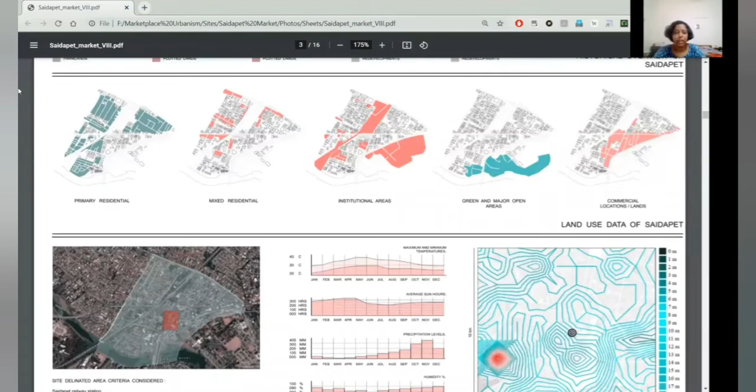Hello everyone, I'm Amrita and I'll be taking over the land use and extent segment of this sheet. The maximum land use in the delineated area that we have chosen consists of primarily residential, followed by institutional areas - that is, the railway station - and then green and major open spaces, commercial, and mixed residential. Mixed residential mainly entails ground floor buildings with ground floor as shops and first floor and second floor as residences.

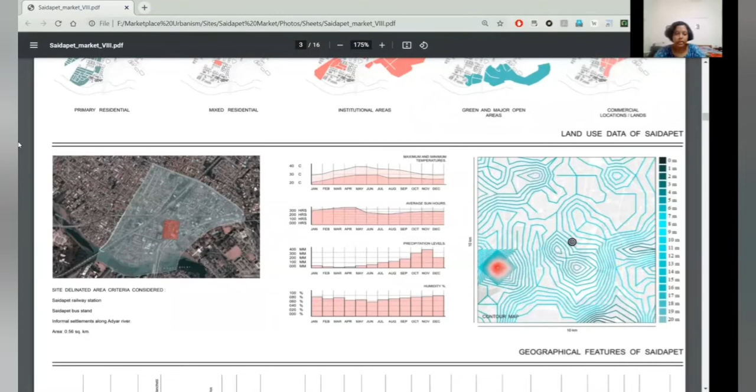The criteria considered for the delineated area are Saidapet railway station's location, the location of Saidapet bus stand, and informal settlements along Adyar River, which act as both a customer base for the market as well as a workers base for the auxiliary workers in the market. The total area is about 0.56 square kilometers.

Welcome back. I'm going to discuss the geographical features of Saidapet. As you can see in the contour map, I have taken a total of 10 kilometers by 10 kilometers square to show what exactly the contour situation is in that particular area.

It is clearly visible that Saidapet market itself does not have any slopes right in the market side. However, on a bigger look, it is slightly sloping towards the east and south side, and on the west side it has a slight more elevation. So the contour did not affect the site much, though slight drainage problems can occur.

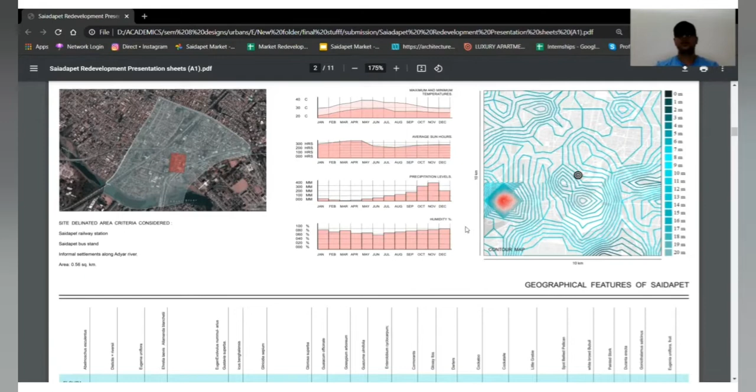With the climate issues, this particular site did not have much of a microclimate because the vegetation in this area was missing. They had vegetation, however we were not able to find dense vegetation or a dense group of trees anywhere. So it had a typical Chennai hot and humid climate, with precipitation levels going up to 300 mm at max.

It had a wide variety of flora and fauna in this area, with neem trees and peepal trees being the most common, and small bushes across every area, plus the Adyar River that served as the major source for watering the plants.

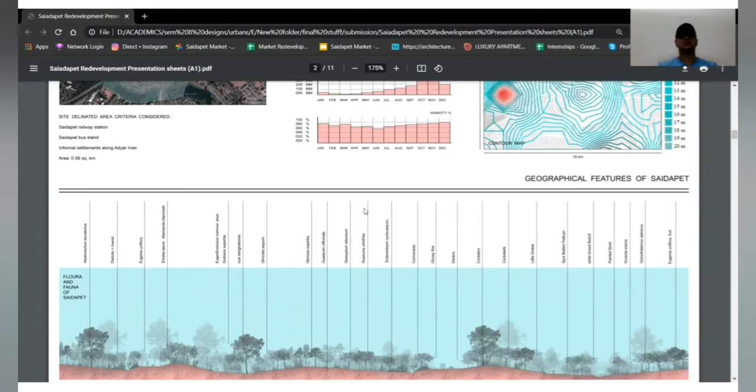As far as the animals go, it's an urban area, so we found most of the animals being stray dogs and stray cats. Two of the most common bird species found were the spot-billed pelican and the white-browed bulbul. These were the only major birds found roaming around the site close to Saidapet.

Hello, this is Pradeep Sundar, and I'll be explaining the introduction of Saidapet. The Maraimalai Adigal Bridge was constructed in 1726, connecting the northern banks of Adyar with the south. It was later reconstructed in the 1960s and now acts as the connecting bridge between Guindy and Saidapet. People coming from Guindy to Saidapet market cross the Adyar River via Anna Salai through this bridge. It was originally obtained by the British East India Company in the 1700s, and it also acted as the administrative headquarters of Chengalpet until 1946.

Around 1945 to 1946, Saidapet was included in the Chennai City Corporation, and the administrative headquarters was shifted to Chengalpattu itself. Until then, Saidapet was the administrative headquarters of Chengalpattu, and it had a large weaver population, with handlooms operated until the late 1990s as well.

It is also known as Saidai. It's a neighborhood in Chennai, and the nearby areas include West Mambalam, T Nagar, and Guindy. The Saidapet Court is the only other court of judicature in Chennai apart from the Madras High Court.

Coming to accessibility and transportation, the suburban railway station in Saidapet is located between the stations of Guindy and Mambalam, and is also easily accessible from the main road. It also has an MTC bus terminus along with a metro station. The MTC bus terminus has frequent bus services originating from this place to other important parts of the city, and the metro station, inaugurated in 2019, also connects to the bus terminus nearby.

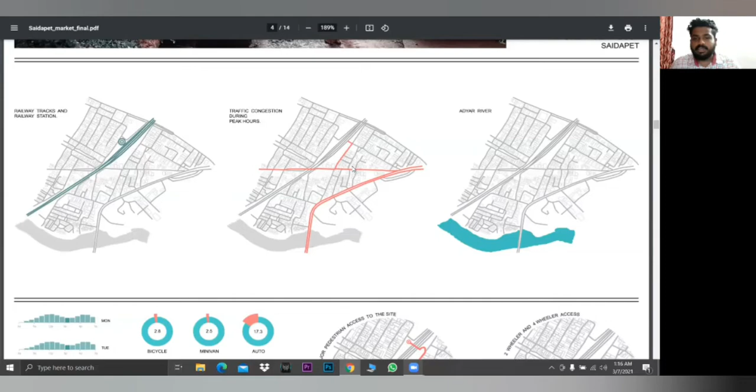Coming to the footfall on each day of the week, the rush will be more on Saturdays and Sundays, the weekends. In the morning, more people come for the meat and fish market, which functions till the afternoon, while the vegetable and flower market functions till the evening. Overall footfall is higher on weekends.

Coming to the major pedestrian access to the site, it is marked in red color, and the main bus stops are between our site. The two-wheeler access is from Bazaar Road, Jeenis Road, and the main Anna Salai Road.

The main access to our site is through bikes and buses. 90% of access to our site is through bikes and buses.

As we went to the market, we met a lady named Raji. She said she was coming all the way from Avadi, picking up 2 buses to reach the site. There are many hawkers and vendors who are not only from Saidapet, but also coming from outside to sell in Saidapet market.

The main mode of transportation for coming into the Saidapet market area is through bikes and buses to the site.

Hello, I'm Akanksha Singh, and I'll be taking forward the presentation in which I'll be talking about the 2 streets connected to our study market area. One of them is the Bazaar Road, and another is the Jeenis Street.

I'll be talking about the Bazaar Street, which is on the northern side of our study area. This Bazaar Road was originally 10 meters wide, but was further divided into 3 parts. In the present day, it's divided into 3 parts. One of them is an underpass.

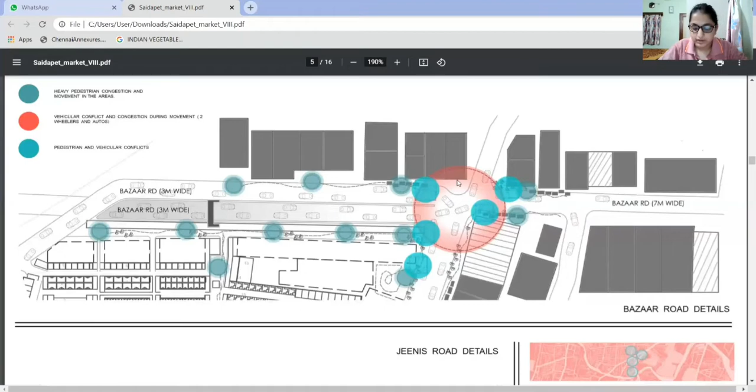Moving on to Jeenis Road, a few activities were mapped to find out certain issues, such as spaces susceptible to crowds, street hawker influence, informal parking spaces, ground floor storefronts, active and inactive edges. For example, certain pockets branched out from Jeenis Street have a lot of informal bike and bicycle parking, and street hawkers throng throughout selling different kinds of merchandise.

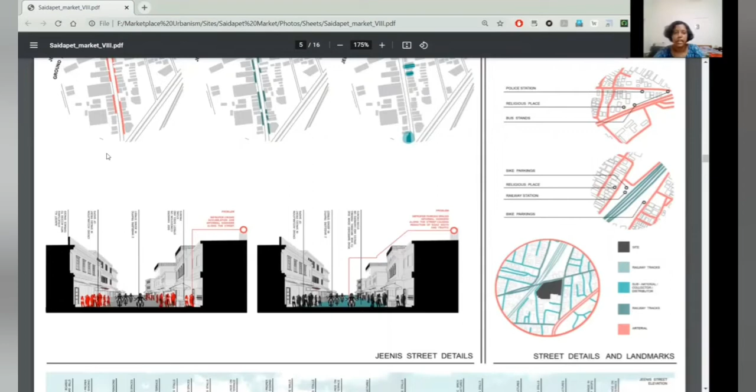When it comes to vehicular congestion and vehicular-pedestrian conflict, Jeenis Street also suffers from these problems, with a heavy flow of two-wheelers and no segregated footpath or pathway for pedestrians, causing conflict as well as crowding and congestion.

The red line indicates how waste disposal works. It is collected from the same point as the point of goods drop off.

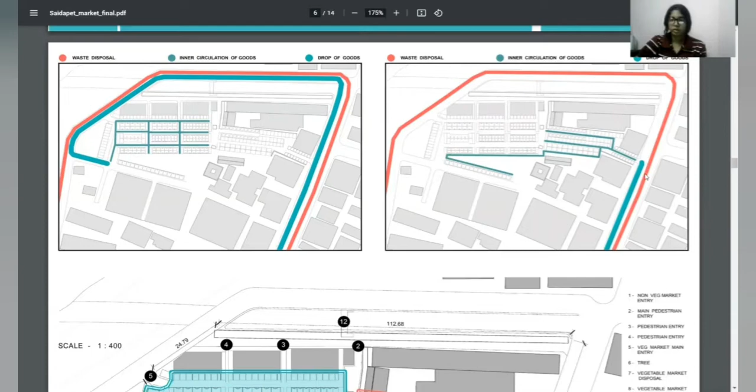The diagram on the right shows goods movement for the non-veg market. The drop-off is on Genus Street at the main entry of the fish and meat market, and goods movement inside the market is shown with thinner green lines. The red line shows waste disposal, collected from the main entry itself, where the goods are dropped off.

Moving on to zoning: number 1 indicates the main entry into the fish and meat market. Number 2 is the main pedestrian entry into the market. 3 and 4 are secondary entries. 5 is the main entry into the vegetable market. 7 is the waste disposal point. 8 is where goods are dropped off. 9 is the warehouse, 10 is a temple, and 11 is an existing toilet behind the temple.

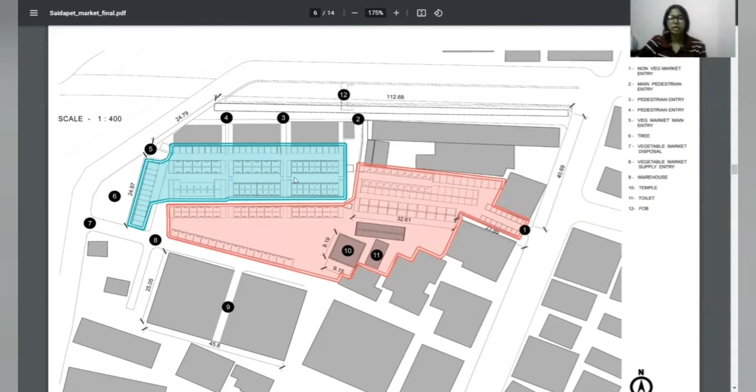The number of shops in the vegetable market is 128, and in the fish and meat market is 116, making a total of 244 shops. The aisle width between 2 rows of shops varies from 1.5 meters to 0.9 meters, which is very irregular and makes it claustrophobic during peak hours.

Coming to the module spot in this particular bazaar, we had a wide variety of modules. However, we were able to classify them based on their physical typologies, the material used, and the areas. We came to a conclusion of a total of 3 to 4 modules that were particularly repeated in this site, with slight variance in dimensions and materials used.

The first typology was mostly used in the fish and meat bazaar area. This particular typology had a segregation in between, done by a partition wall constructed with brick and mortar, and cladded by porcelain tiles with pink or blue color paint. This particular module had 2 parts in it.

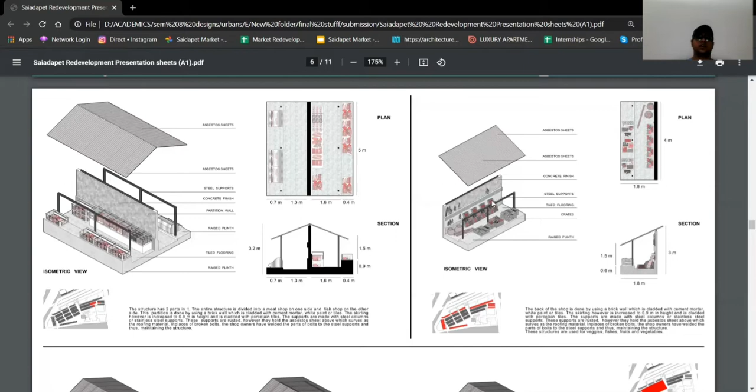Many of the modules have storage spaces right inside them. These were constructed with wood; however, the wood was completely damaged and had termites in it. So many of the modules were abandoned, not even fit for sitting there. It was completely abandoned.

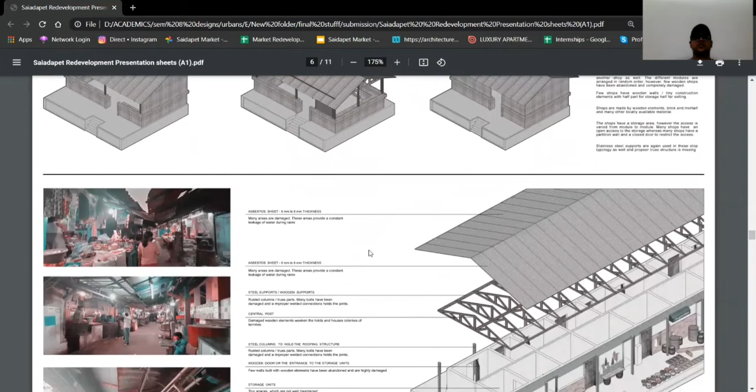Moving on to another typology of module, called the long stretch. This particular module was 16 to 20 meters in length and 7 to 10 meters in width, and housed around 20 to 25 storage units and rooms, with 30 plus shopkeepers owning this module. They sit at the plinth level and sell their goods, while extra goods are stored in storage areas. A difference in this module is that it did not have just normal steel structures, but rather a proper truss structure that supported the asbestos roofing above it.

However, the wooden truss structure had termites in it and was too weak, whereas the truss structure created by steel had rusted, and yet needed welding again because the bolts had fallen down.

In this module, the materials used were brick and mortar for the walls, then porcelain tiles, skirting, and exposed concrete here and there. As we can see in the plan, not every single shop has its own plinth level, but rather a common plinth level, with around 3 to 4 areas where steps were provided for the entire shop module to circulate around. People used to take the steps to move around.

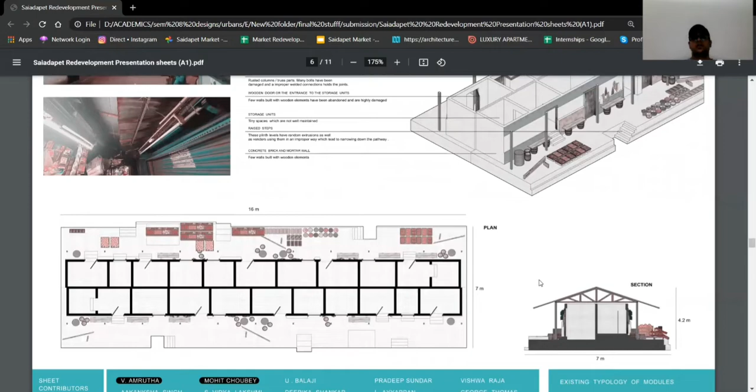In the section, another difference is that the wall did not reach the top. The wall was chopped off right at the center, because an extra gap was created above that served the purpose of truss support as well as ventilation and daylighting. However, this was not well maintained during the rainy seasons, and goods were spoiled, roofs were leaking, and the trusses were starting to have major damage, so this module needed a lot of attention.

To get to know the market even better, we wanted to look at it from the user's perspective. So we tried talking to and interviewing a few people inside the market, mainly daily wage workers, shop owners, customers, and a few other people.

The objective of the study for the market was categorized into 4 categories: functionality, imageability, socioeconomic, and accessibility. After which we came down to 6 objectives.

The first objective is decongestion through rearranging of market modules. Second, address and solve issues of parking space for all stakeholders. Third, proper stormwater drainage and air ventilation inside the market. Next was the waste disposal system and sanitation inside the market, decongestion of footpaths, and traffic calming on the main roads, which are Genus Road and Bazaar Road.

After which we tried to list down the issues inside the market. The main issues identified were improper garbage disposal near each shop and unhygienic conditions inside the market.

In the first image, you can see how the roofs are patched with fabrics wherever the roof has broken or become loose. This, during heavy rains, collects water and is a problematic situation. The second image shows how the streets narrow down as you move into the market, and during peak hours it gets really claustrophobic inside.

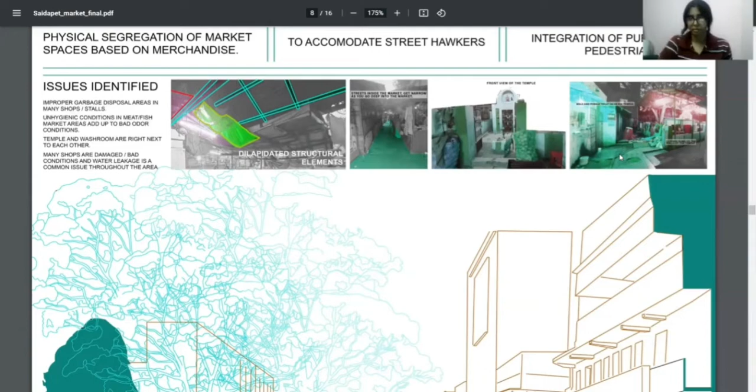The third image shows the front view of the temple inside the market, where you can see goods stored even around the temple. The last image shows how the washroom is right behind the temple, and even on the temple walls people use the space to dry their clothes.

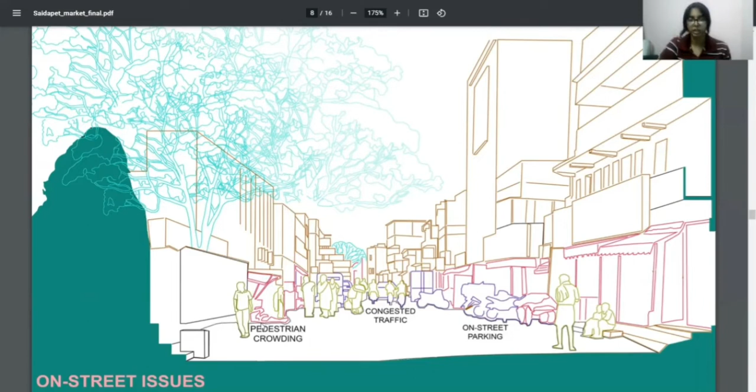On a street level basis, we tried to identify a few more issues, mainly pedestrian crowding. Since there is no proper footpath on this major street, people also walk on the main road, and since there is also a lot of traffic moving, this causes a lot of congestion.

There are a lot of street hawkers, and people just park their vehicles right next to the hawkers to buy stuff quickly. This on-street parking again adds to the congestion of traffic on these major streets, especially Genus Road and Bazaar Road.

This is Ayyappan. I will be talking about the proposals made on Genus Street.

Genus Road is the road that connects Anna Salai with the market, with a stretch of around 25 meters from Anna Salai, and the width varies from 10.8 to 11 meters. This road has a lot of retail shops, restaurants, tea shops, and utensil shops, etc.

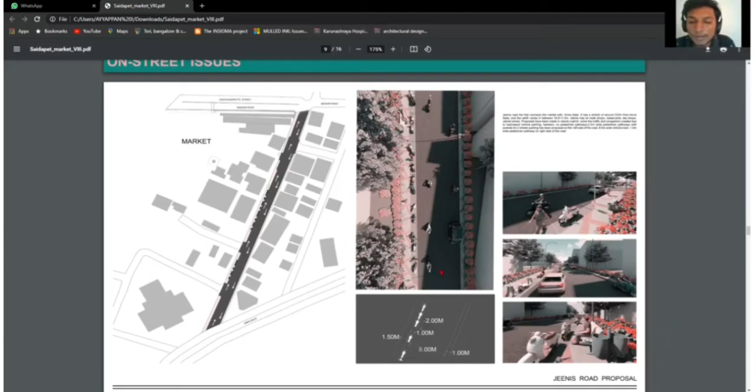This is Balaji, and we are going to talk about the Bazaar Road proposal. The Bazaar Road is located perpendicular to Jeenis Road and adjacent to Anna Salai. In the given image on top, the highlighted black area is the Bazaar Road, which leads into Anna Salai.

We are going to see the various issues faced on Bazaar Road, such as no proper designated area for street hawkers, which causes a lot of pedestrian traffic, and improper street parking for two-wheelers and autos, which causes a lot of vehicular traffic. We have designed a proposal accordingly to mitigate these issues.

This is Deepika, and I'll be talking about the proposals that we have designed for Bazaar Road. Initially, Bazaar Road was used as a two-way road, which caused a lot of congestion on the street during peak hours.

The pedestrians did not get a designated area, and the people who parked their vehicles, two-wheelers as well as autos, did not have a proper place. So firstly, we have changed the circulation to a one-way road, which would reduce a lot of congestion in that street. Secondly, we have introduced pedestrian pathways of 0.9 meters on both sides and 1.8 meters of angular two-wheeler parking on one side.

This creates a designated area for the pedestrians as well as an assigned place for the two-wheeler parking.

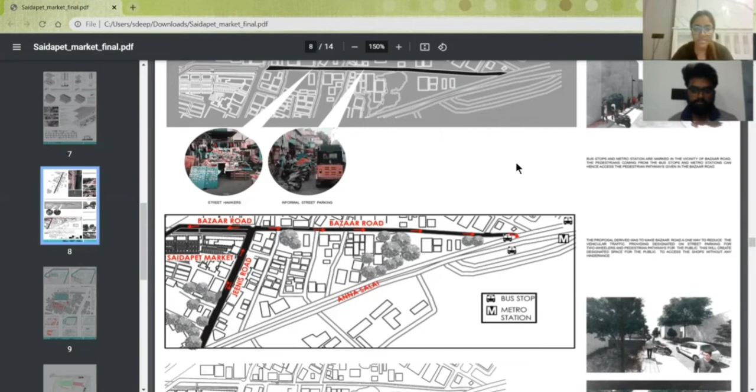In the given circulation map below, we have marked the bus stops and the metro station in the vicinity areas. The public coming from the bus stops can access the pedestrian pathways from the Bazaar Road, which is from Anna Salai.

Given below are the plans and sections respectively, and on the right-hand side are the visual representations of the Bazaar Road.

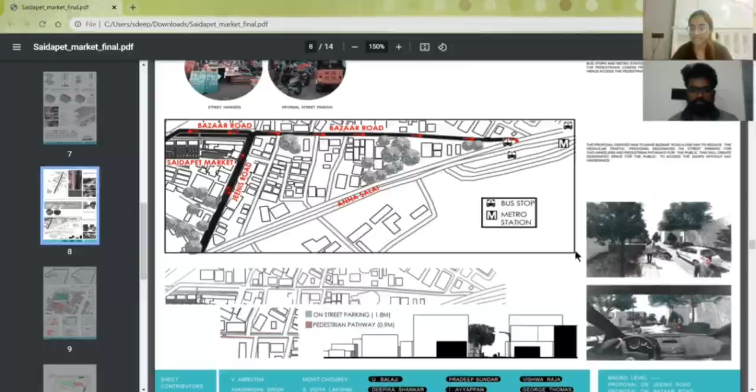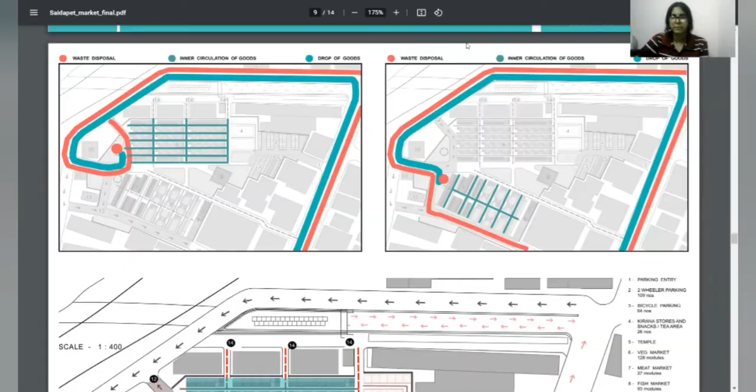Now, for a better flow of the market and to improve its functionality, we proposed a new master plan by zoning the non-veg market and trying out different circulation, making Bazaar Road and Vinayagampet Street a one-way street.

Due to this, we got a lot of pros: we were able to fit in the kirana stores and the two-wheeler parking, and we were able to relocate the toilet facilities away from the temple, which was previously a question to the dignity of the temple. Because of this, we got a nice green space.

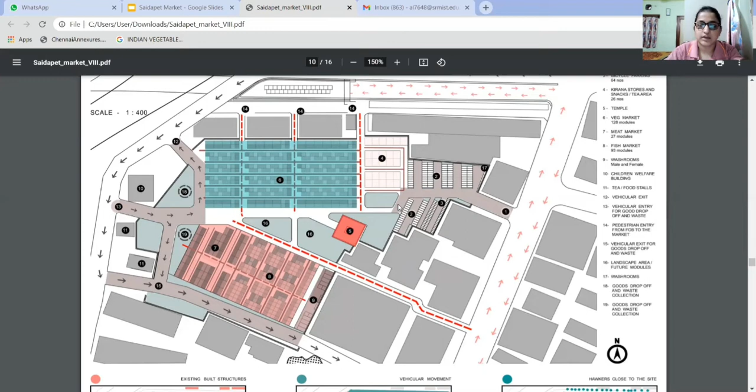Here you can see a nice green space around the temple, which acts as the center of the whole site, and all the pedestrian entries meet at this temple point, which is now the central point of the whole market. Further, here are a few visual representations of the existing built structures in and around the market site.

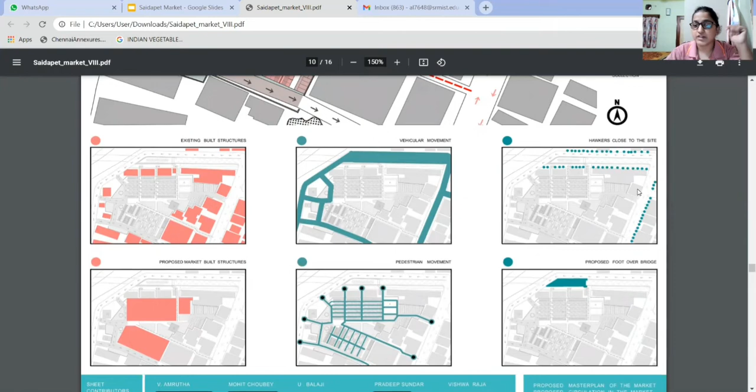What is the vehicular movement? How are the hawkers arranged near our site? Then, what is the proposed build structure and roof structure for our market site?

These are the pedestrian entry points and pedestrian movement inside our site. And lastly, we proposed an expansion of the footover bridge to connect the other side of the road, which is also now part of the market.

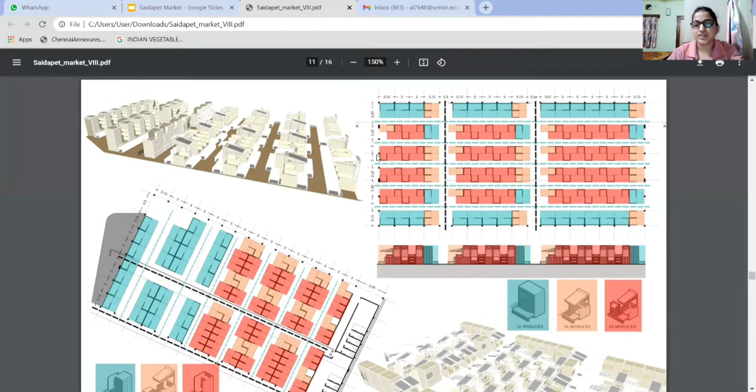The black dashed lines are the two main pathways, approached through the entries, and the blue ones are the secondary pathways abutting the main ones. Here is one of the views of the vegetable market.

Similarly, we've color coded and used 3 modules for the non-veg market. The biggest one is for the meat market, since it includes activities like chopping. The blue ones are for meat, and the red and orange ones are for the dry and wet fish market.

Again, the black dashed lines are the main axis, which are 2 meters wide, and the blue ones are the narrower pathways in the market area.

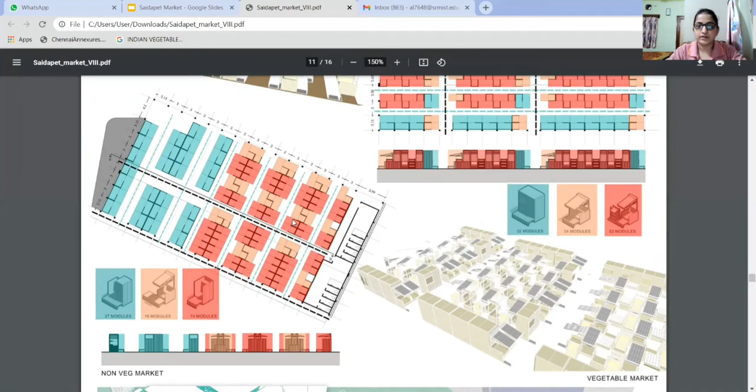Near the meat market, we have provided seating spaces for people to wait. Here is one of the views of how the non-veg market modules are arranged.

Further, Amrita will be taking up the expansion of FOB proposal.

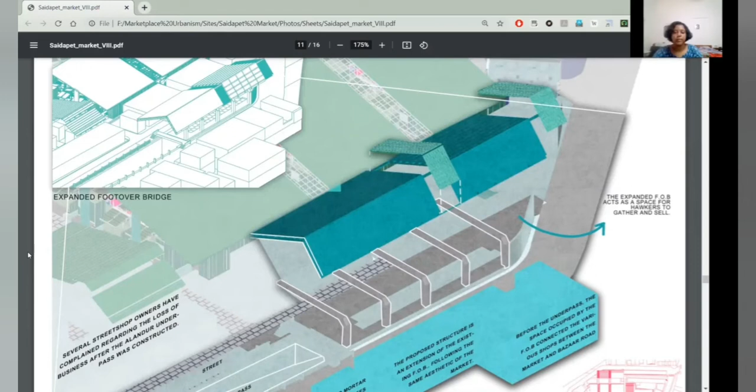Thank you. Moving on to the intervention of the footover bridge, one of the main issues we discovered after many talks with our stakeholders was that the underpass, built about 2 to 3 decades ago, caused a rupture in business and a decrease in revenue.

So we tried to literally bridge the gap by expanding the footover bridge. The proposed structure is an extension of the existing footover bridge. There's a small existing footover bridge right here, which follows the aesthetic of the market as well, so a sloped roof is provided.

This is an exploded view of the footover bridge. Several street shop owners have complained regarding the loss of business after the Alandur underpass was constructed.

So in order to reinvigorate revenue in the entire market, we thought of taking the extended footover bridge as a connection between Saidapet market, the Kirana stores, and also brick and mortar shops and cafes on the other side of Bazaar Road, integrating all of them together in one single space.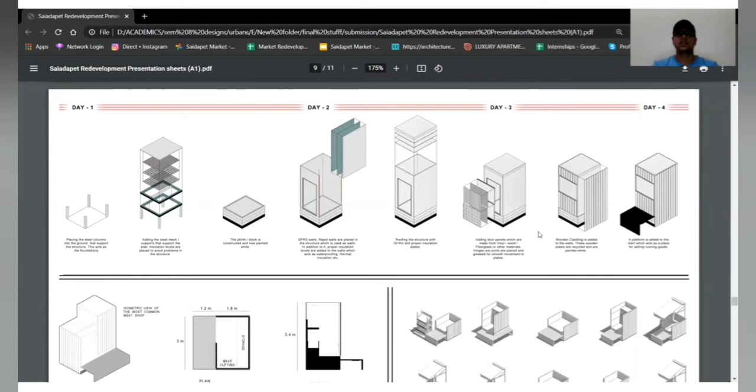A small platform is created right in front of the module, which serves the purpose of selling running goods, while the interior of the module is now used as the storage unit.

We had 3 major modules, or more than that, used in this particular site. The plans and the elevations are shown on the left side.

Just in case a person comes to the site for future expansion after 5 years from now, will they have the same modules? Will their requirements increase or decrease? On that basis, the modules can be transformed with larger spaces, smaller spaces, modules with high ceiling levels, open modules, or modules with awnings. So multiple modules can be created based on future requirements—it's a clear future requirement.

As you can see in the diagrams, step 1, step 2, and step 3, the module can be closed and opened.

So the platform, when not in use—let's say during fish and meat market hours, these markets close around 9 or 10 a.m.—after that the platform isn't used at all, and it takes up space on the street, reducing the street width. Now, in this new typology of module, the platform can be folded back, increasing 1.5 meters on either side of the road, which can be used by pedestrians or people in the veg market area.

On step 3, we can add a sun shading device—not really add, it's like a door that is now open. As shown in the section, this door is now open and acts as the shading device. This module had options: if they wanted proper shading devices, they could add them; if they wanted an awning, they could add that; if they wanted a completely open module, they could still do so because the entire site is now covered with a roof above it.

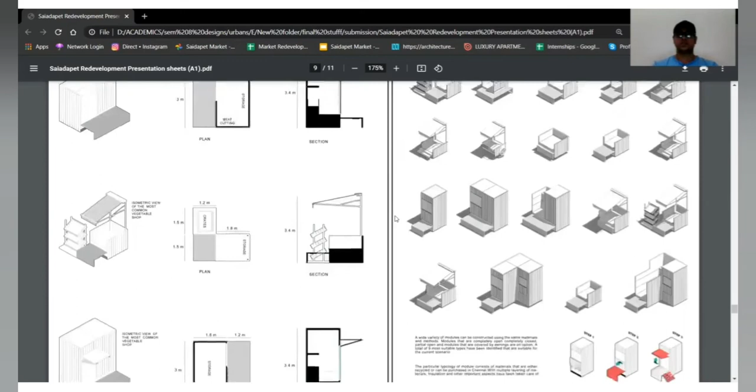The exploded isometric view is as follows. We have a total of 2 major modules: the first being completely closed with the shading device, and the second being completely open with just an awning. The materials used were GFRG sheets, walls, and rapid wall systems, as we call them in Chennai.

It is slightly more cost effective than normal brick, mortar, and cement. Wooden cladding was also done—not really necessary, but it brought a sense of Saidapet feel into it, which is why we selected this material for cladding. These wooden elements can also be recycled from the site, so it's a slightly sustainable approach.

The platform can be added in later stages, along with other materials such as waterproof coating, foam board covers, fiberglass doors, and stainless steel hinges. These small elements brought in the period feel of Saidapet, and they also brought a sense of comfort to the modules, since waterproofing became a slightly important consideration.

On the second module, we took a slightly more minimalist approach since we don't have many shelves inside, or high wall systems or high ceiling systems. Instead, we just have an awning system—an awning with inscriptions of the Saidapet feel, not just flat covered, but with slight textures and patterns of Chennai.

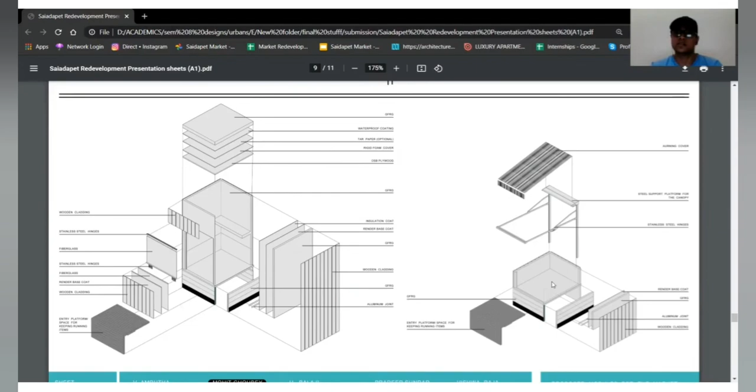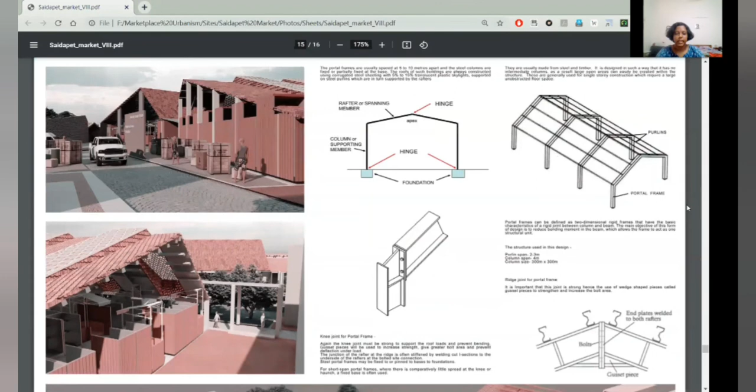Moving on to the main proposal—the market space and the roofing structure for the market—we tried to go for an aesthetic more appropriate to the context of Saidapet, since the street as such doesn't have a distinct aesthetic image of its own. We took certain Southern Indian or vernacular elements, such as the pitched roof, and superimposed those ideas with more modern technology and construction methods.

We chose a portal frame structure so we could have a completely column-free space, with most columns on the periphery. The interiors are also styled in a more vernacular manner. For natural lighting and ventilation, we have jali structures or openings on top, which is a modernistic extrusion or expression of the larger sloped roof. A public space between these two roofs is also created, which emphasizes the temple's entrance.

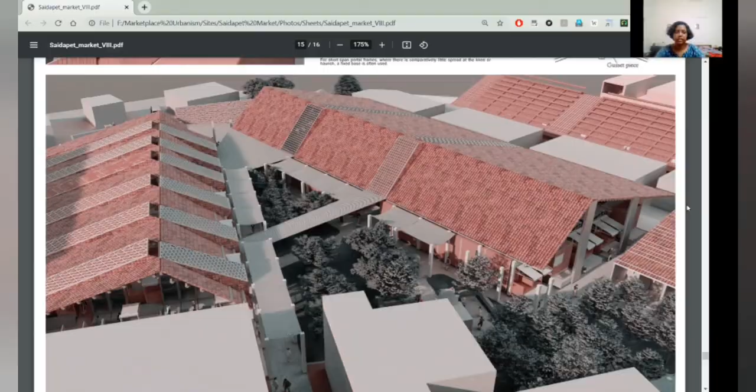For the roofing material, we chose a portal frame structure since it's typically used for large span structures in single-story spaces needing an unobstructed area, like a market space or factory. We also used jali elements for ventilation and daylighting.

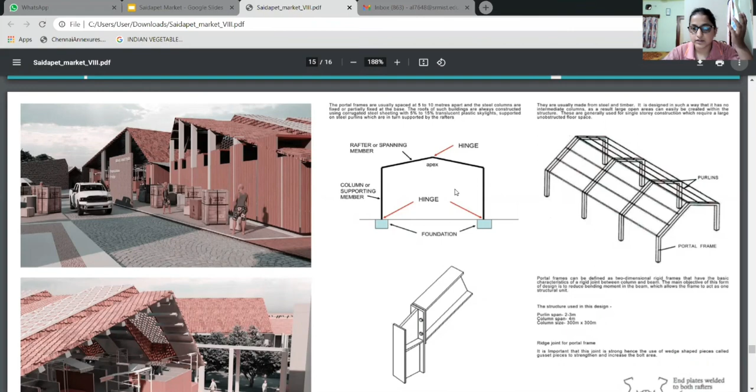Here are the structural drawings of the roof structure we used. The purlin span is around 2 to 3 meters, and the column size is 300 mm by 300 mm, with a span of 4 meters on the perimeter of the vegetable and non-veg market.